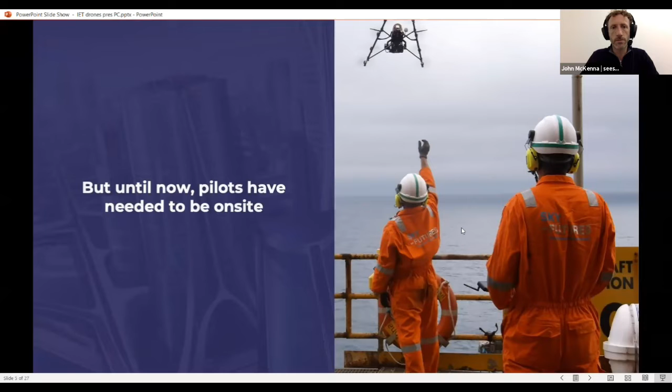So when we created Sees in 2017, I guess rather naively back then, I'd been flying and working with autonomous drone systems for quite a long time. With a background in engineering, my original career was - I did an undergraduate degree in civil engineering, did a master's in Imperial College in structural steel.

I worked in Arup, working on buildings like the new Grandstand at Lords, the Angel of the North, the new Houses of Parliament and Portcullis House. And I really saw firsthand, both on the design side and on site, the potential of aerial data to help increase efficiency, productivity, reduce safety risk, and reduce carbon impact.

So we've been working on this now for 4 years or so, with a very strong team which I'll talk about in a minute. We've developed what is now one of the most, if not the most advanced technology for unmanned flight. I've not seen anything that does quite as much as this.

It's a system which carries essentially the same sensors as an autonomous car. It maps its environment in real time in 3D. It flies autonomously in accordance with that map, and it captures data efficiently in accordance with that map.

And then it intelligently understands the bandwidth that's available back to the pilot, and so it streams a very helpful synchronized version of the 3D model back to the pilot, which gives the pilot radical transparency in terms of how the mission is playing out, but also radical control of the mission. So it's a very tight teaming of man and machine.

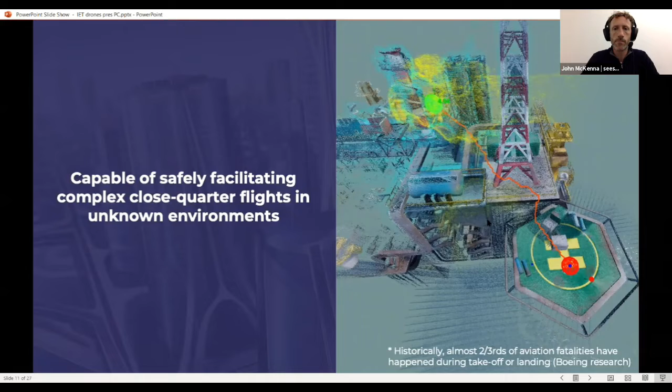One of the interesting outputs of this 3D modeling approach is that the system simultaneously maps its world in 3D and takes images, so we're able to map the 2D imagery into the 3D model. We actually deliver structured data.

If you typically fly a drone, you capture a thousand images, and machine learning algorithms can spot a problem, but you don't quite know where it is. With this approach, the geo-tagged 2D images in the 3D model mean that if your machine learning algorithm spots a problem in any 2D image, you can locate that on the 3D model. That's super helpful.

This whole architecture has been designed to scale. We built it on the cloud so we can deploy it at large scale. Any number of systems can be flown by any number of pilots located almost anywhere. Latency isn't particularly a problem because the system is flying itself—it's connected and autonomous.

The system ultimately takes care of all low-level control while the pilot is involved in the mission, setting the high-level task, and from a regulatory point of view is an important contributor to safety.

One of the interesting things about this approach is that because every system that flies is cloud connected, we ingest a huge amount of data from every flight, and we use that data to improve how the system performs and to prove and capture data about safe flight as we progress. We're able to demonstrate to regulators, procurement professionals, insurers, customers, and clients that the system is safe and fit for purpose before we advance to more complicated missions.

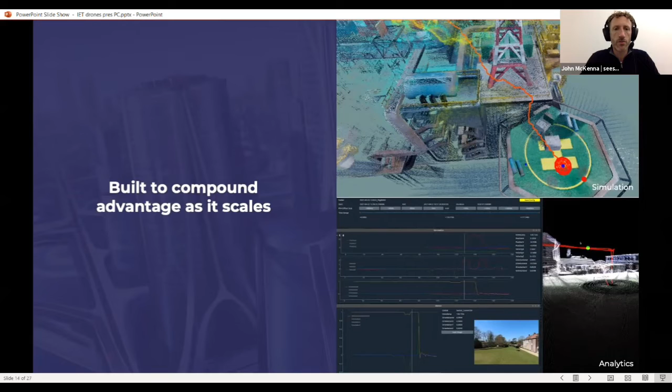We're leveraging quite advanced tools, as you'd imagine, from our Formula One and hedge fund days—analytics, diagnostics, and a lot of simulation to make sure that before we ever fly a system for real, we've tested it in simulation. The whole architecture deploys a lot of software to make sure we extract maximum value from each real flight we undertake.

Our start point is unusual or different to most. Many drone businesses have started by flying in rural or remote locations or in poorly regulated spaces in order to first build safe flying hours and then demonstrate their safety to regulators. We've got a slightly different approach: we believe if you're going to sack Troy, or win Troy, you're better off starting on the inside of the wall.

We've been working with a large number of asset owners and operators to help them understand the potential of our system, but more importantly for us, to more deeply understand their problems and find out where our technology can be best used.

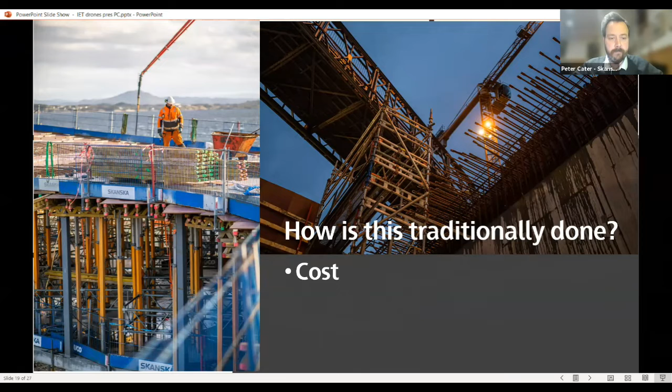But we do have traditional methods. I'm sure the engineers out there are not unfamiliar with scaffolds, alloy towers, cherry pickers, and working at height. But all of those things require a level of skilled operatives. Those skilled operatives have to travel to site, usually with the specialist equipment. They all incur cost, they all generate carbon, and they all place people at height.

Or, as we so often do, we just don't check. So if we don't meet that first obligation of cost, so often the parts that we want to check or we'd like to have a look at just don't get done.

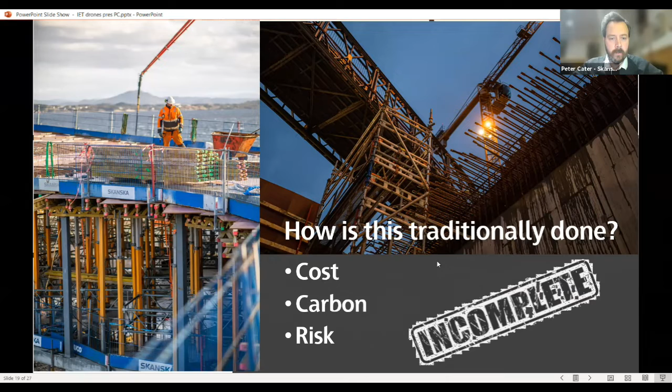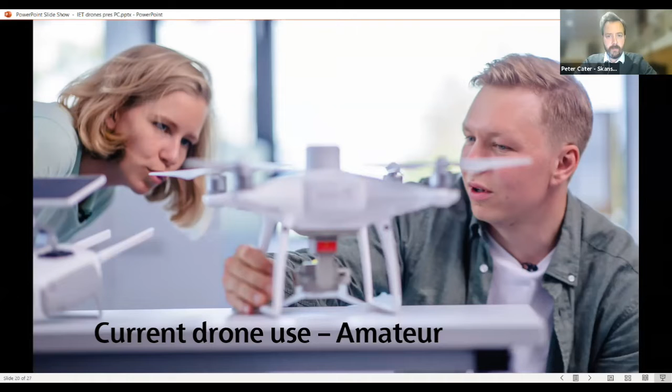So leading on to drones as we know them in the construction industry, you may or may not be familiar with this. Current drone use in the amateur sphere, we have seen this on sites - people who've bought one for Christmas, or they're just an enthusiastic amateur, even if they've got the appropriate licenses.

It presents issues for us on site as far as risk assessments are concerned, for their insurance, public liability insurance, the legal aspect of requiring certain permits and permissions. So permission is required to fly over anyone else's property. Quite often the accuracy and the resolution, and that leads on to the reliance.

So generating reports either by camera or video, and then having an element of reliance in that - a company you can go back to and say, is this what we're seeing on this day, and in this detail? And broadly, they are camera only.

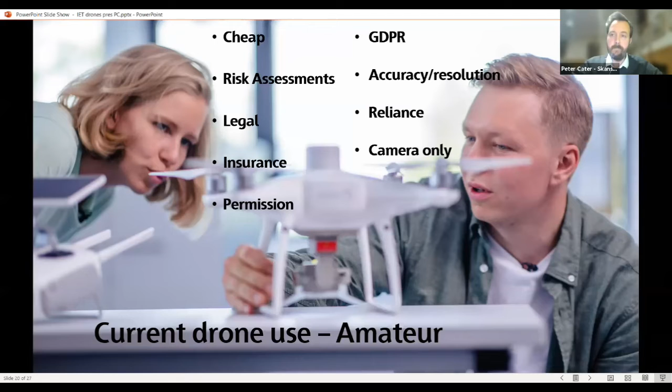It says at the top there GDPR. If you're not aware, if you have a camera or video and you're taking shots even on your phone, there are GDPR issues around getting consent, written consent, and these things are generally overlooked. It's not uncommon for news stories of people complaining about drones flying over their back gardens. You have the same issue on large construction sites where you're not appropriately blanking third-party properties or neighbours. That kind of information could look nice, so it goes to publish, and you can be hit with fines.

And then we also have current drone use which is professional. So broadly, they're legal, insured, and reliant. There's multiple payload options, not just camera and video - you can do photogrammetry, LiDAR, heat signature, multiple different payloads.

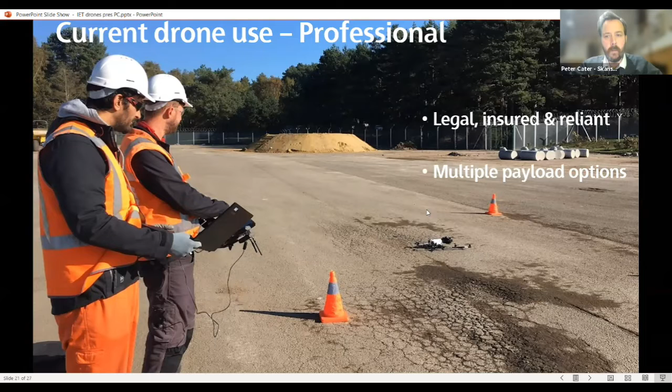Generally a two-person operation in order to get the insurance and to complete the RAMs, certainly for the larger sites. It is not inexpensive. I'm not going to say it's prohibitively expensive, and compared to some of the traditional methods it can be comparable. However, it is not inexpensive.

And there is low industry take-up, because of bad experience previously. As John was saying, this technology has been around for a number of years, and like the internet bubble, there were a lot of people straight away going, I can do drones, I can do drone images, but they were many thousands of pounds, and the data would take quite a while to be processed and returned to you, and perhaps it wasn't really what you were after. So low industry take-up because of some bad previous experience, and certainly poor understanding of what can actually be achieved through use of professional drone companies, and knowledge of the payload and accuracy that can be sought.

We generally aren't furnished with those details, so we're not good at making those cases - saying here's the cost of an alloy tower with 2 men for 3 days versus the cost of a professional drone company. We're just not good at it.

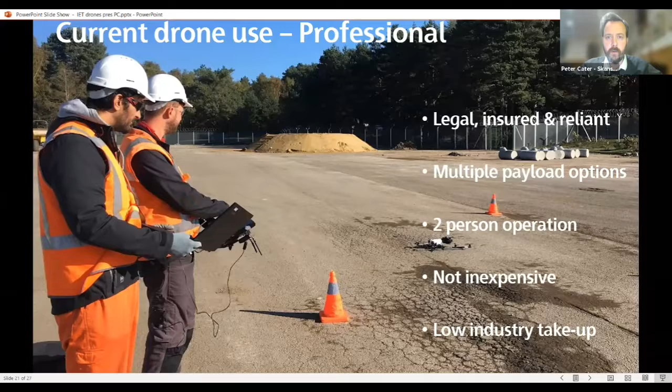But both of those options, whether amateur or professional, require line of sight - direct visual line of sight. As John said earlier, that means the operator, the pilot, being able to see the drone at all times. What we're looking to do with this technology is take it beyond visual line of sight.

Beyond visual line of sight, or BVLOS - catchy little phrase - BVLOS benefits: in essence, there are no people required to attend site. If there's no people attending site, there's not the van, the 2 people, the cost incurred of that, and certainly no carbon from that. And because there's no people attending site, there's less risk. Less carbon, less risk, less people leads to less cost.

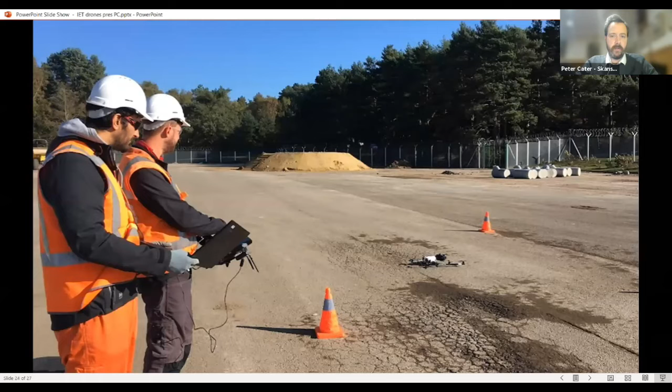This picture here describes BVLOS in its infancy. There's a lot more work to do, a lot of regulation to get through, and a lot more technology to evolve. But certainly, this will change the way we work and live.